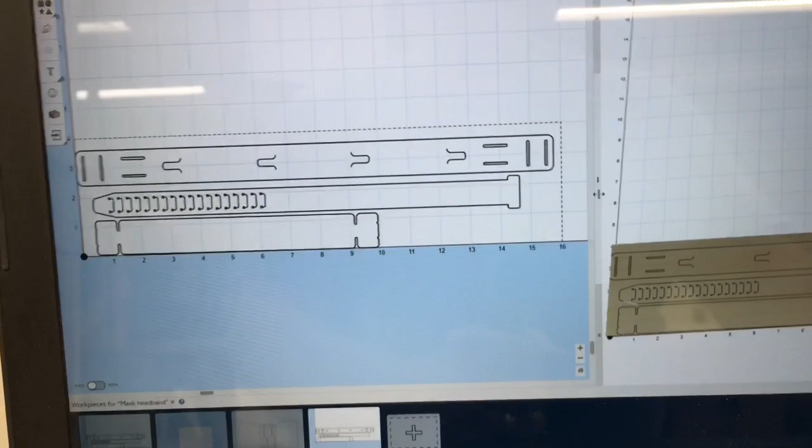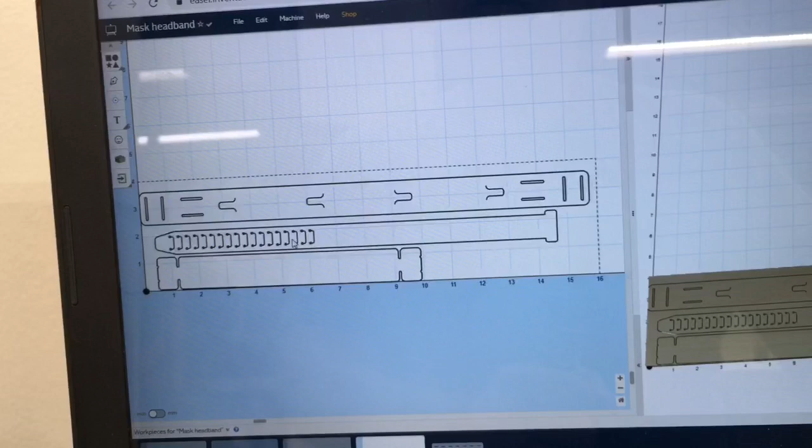Now the two files that I settled on was this one with just the headbands. The nice thing about this is these little tabs will allow the face shield to just slip on and hold it in place by having holes in the face shield itself. These little tabs here are really designed so that the ends can just slip in and hold it in place. So this one doesn't require any type of tabs at all. These little tips here are designed to slip into these slots to be able to hold it in place. So I wanted to be able to try this one.

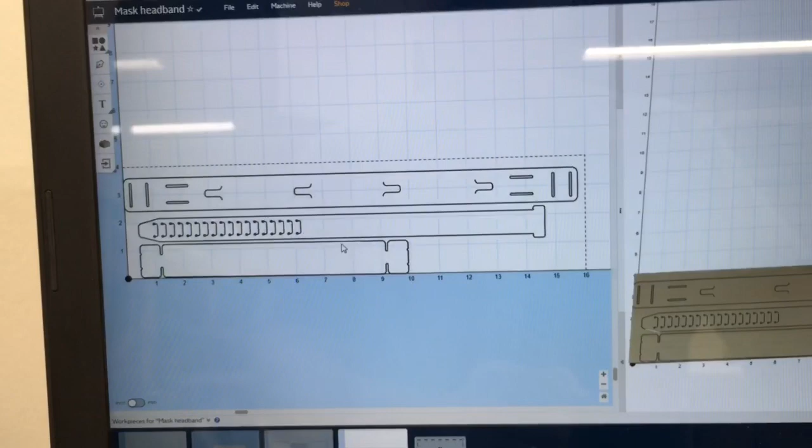Now the nice thing about this was a file that I found online, and quite frankly I don't remember where, but it was a free download and it was a DXF file. What I was able to do is just come over and click on this, and I can just import using this setting right here, DXF Import 2.0. And it actually brought the file into Easel.

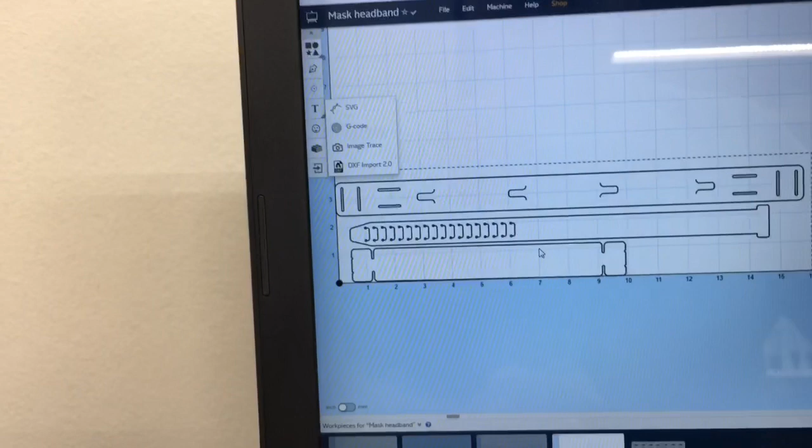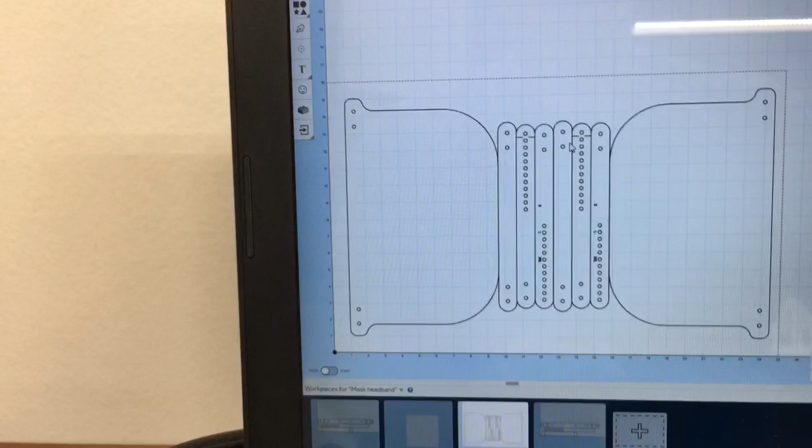The other file that I have was actually a larger file, and this had the face shield itself. The nice thing about this one, it's actually two face shields. I'm going to slide this over a little bit for you. Each of them have 3 bands. So these 3 bands will go with this face shield, and these 3 bands will go to this one. The only problem that I don't like about this one is it requires some type of a snap or a clasp to be able to hold it together. That's something I don't have, but I still want to be able to see if I can carve this.

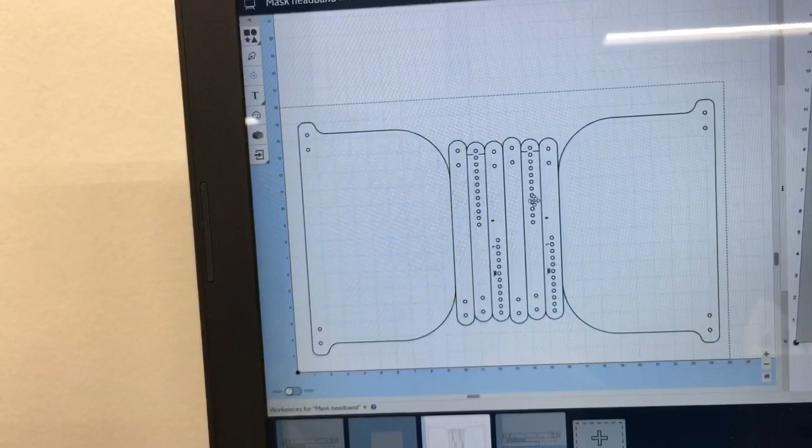Now this particular file was originally designed to be able to cut on the laser. Now I did eliminate the tabs, because it did have tabs scattered throughout this whole thing because of the different pieces, and I've eliminated all of the tabs. So I'm going to be using the glue and tape method to be able to carve this.

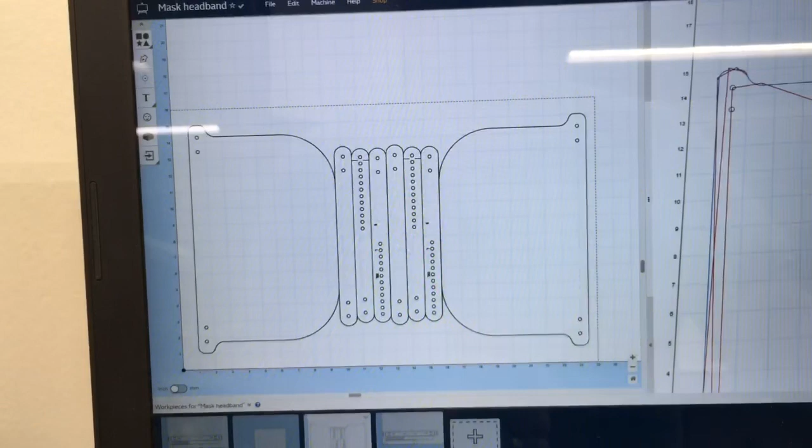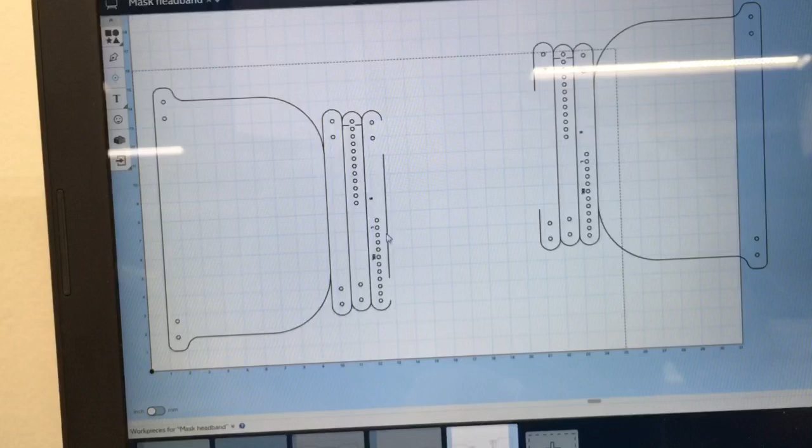Now one of the things I'd like to be able to do is just experiment with cutting out one mask. So what I did is just highlight it, and I'm going to open this up a little bit bigger. I highlighted this first one and pulled it out of the way. And you can see that this line right here is actually joining the same one. Alright, with that selected, now, and the endpoints are actually right here, I can grab hold of this and slide it right up to this other node.

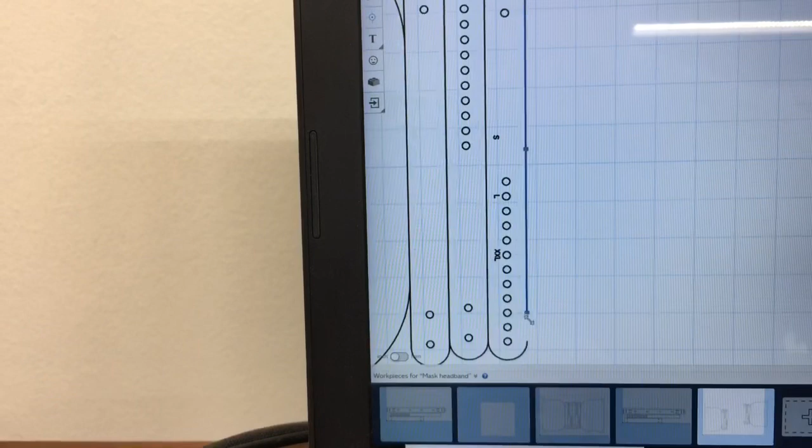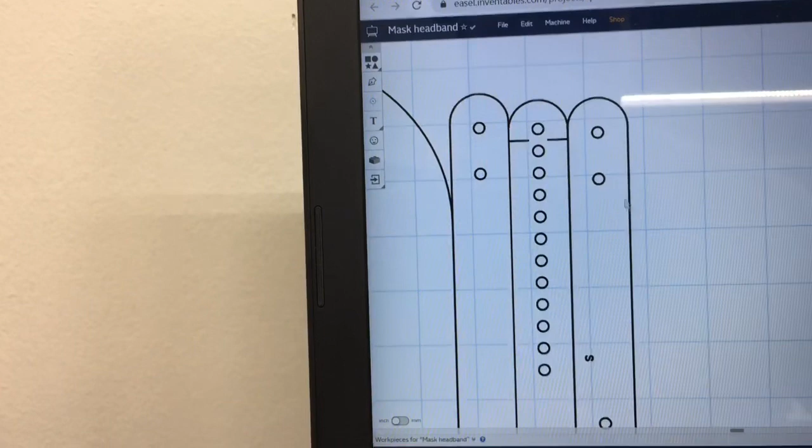And then I'm going to do the same thing down here. I'm going to grab it and bring it right down to this point. Now it's connected. Now this one up top did not connect, so I'm going to slide it up a little bit more so that it connects. And I'm going to zoom in even more and take a look at it. And I want to highlight both of these.

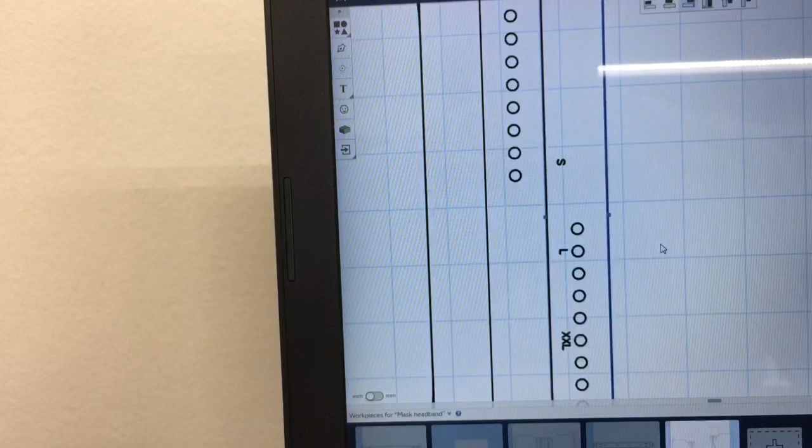And now I can see both of them, and it looks like it's joined together perfectly. I'm going to scroll down to the bottom and highlight both of these again, and it looks like it's perfectly joined. So that's one of the things that had to be done to be able to modify this to be able to carve.

With that now joined, it should allow me to carve one of these instead of both. Let me zoom back out. Now this one over here, I don't want to lose it, but I'm going to go ahead and put this one out of the way. I'm going to slide it right up here.

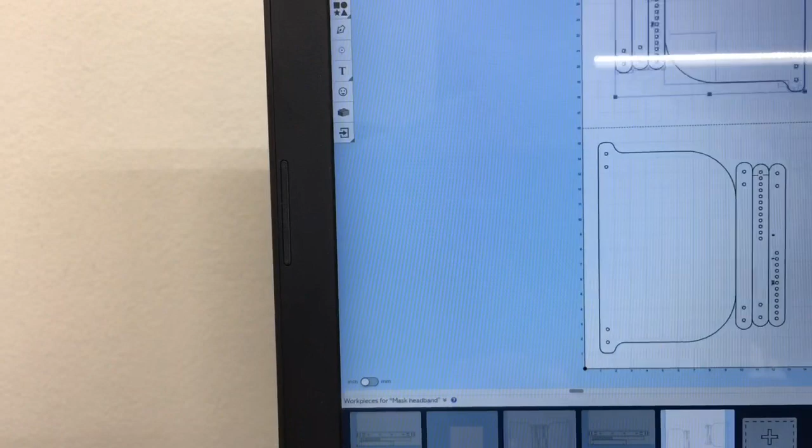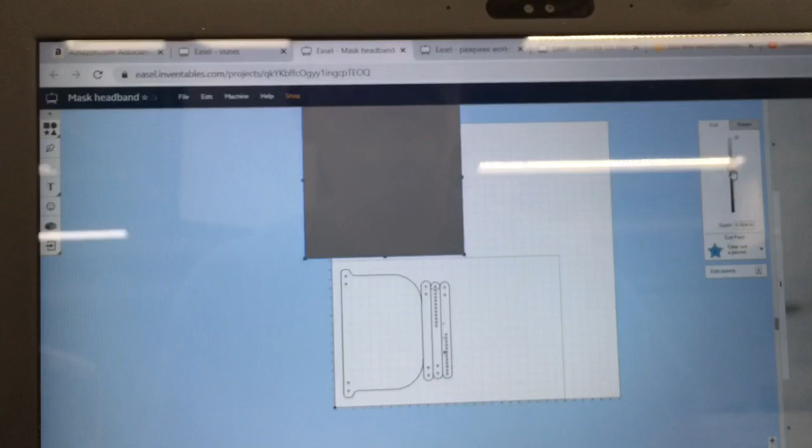And then the next thing I'm going to do is select a box. We've done this before. I'm going to make this box large enough to cover the whole entire area that I do not want carved. And then I'm going to change it to a 0 cut setting. With that at a 0 cut setting, I now cannot see it over here.

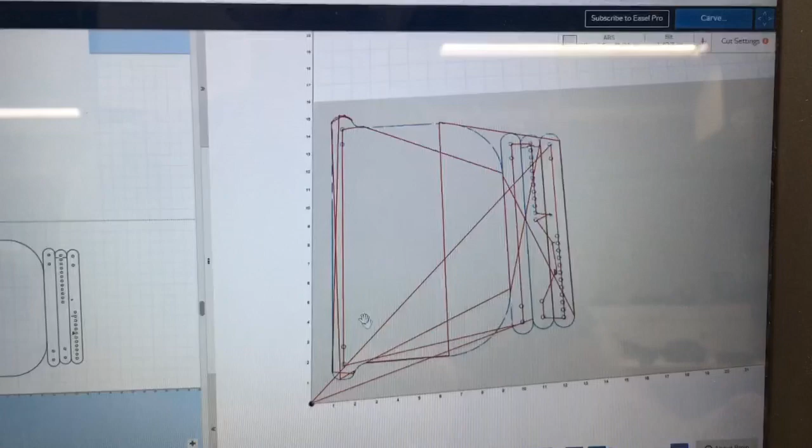So what I want to do is just go ahead and generate the preview, and let's set this up where we can actually see everything. And there is the one. If I do simulate, what's it going to carve? It is going to carve just the one. So that looks like it's going to carve just fine. So now I can go ahead and carve this.

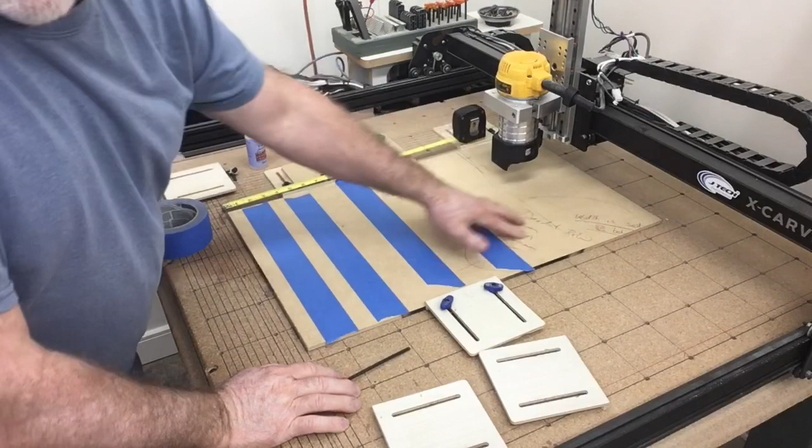Now I have my auxiliary wasteboard put in position. I'm using a tape measure as a reference to what's on the screen, and I went ahead and laid out all of the tape lines. Now the nice thing about this, I can come over and drop this right in place.

And then put the tape right where it needs to be. Just like that. And that helps to get the alignment where the tape's exactly positioned correctly.

Now then, the next thing I'm going to do is just flip this over, add the glue to it, and then that will drop in place right there. These little tabs of the extra tape I'm going to leave because it actually helps. It makes it a little bit easier to be able to remove from the machine once it's done.

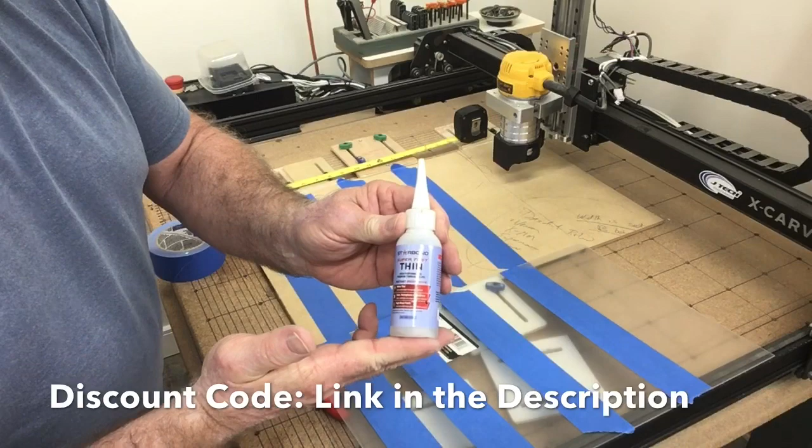So I'm going to go ahead and set this now right here. Add the glue to it. And the glue that I'm using is the Starbond glue. This is the thin, and I'm going to go ahead and put that on now. Now I could have used a medium thick glue. That would probably have worked better. But I don't have any that's open right now, so I'm just going to go ahead and use this.

Now I'm going to go ahead and flip this over and put it right in place. And I'll hold that down for just a moment. And we're ready to go.

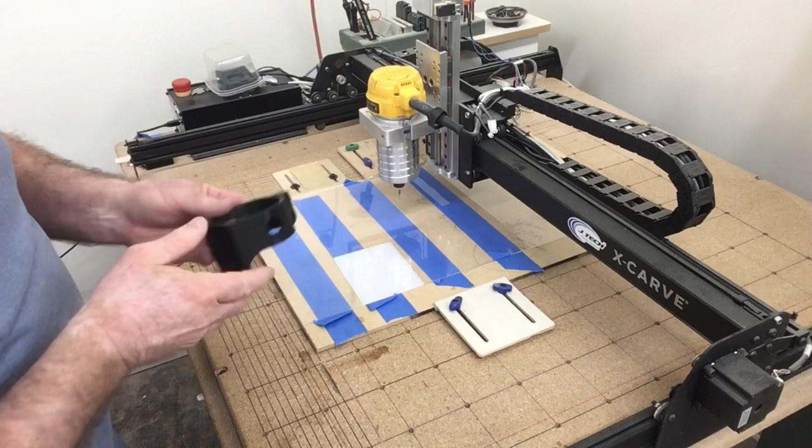Now the bit that I'm going to be using is a 1/32 upcut bit. The reason I want to use the upcut bit is so that it takes the chips and pulls it up and out. You do not want to use a downcut bit anytime that you're cutting the plastic. Now I did remove the laser mount and took it off of the router, and it just makes it so that you can see the operation easier. I did not need to do that, and if I wasn't filming this, I would have left this mount onto the router.

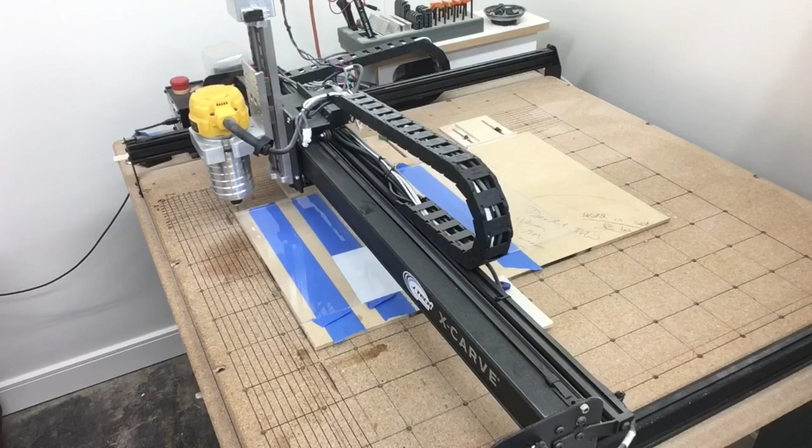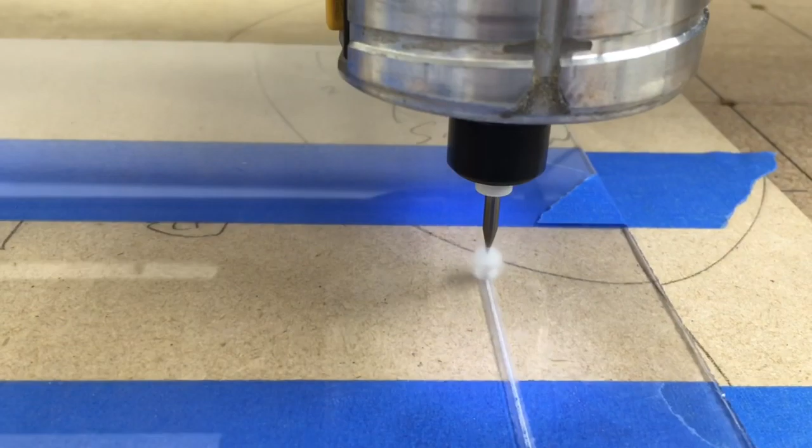You can clearly see that the acrylic is actually melting, so I'm going to stop this carve now. One of the things you can see is there's a lot of plastic on here that is melting, and I don't want that. So I've got to speed this up to be able to make it work.

Now I went ahead and changed the bit. I put a brand new bit in it, and I'll work on cleaning this bit in just a few minutes. But I went ahead and changed the setting to 60 inches per minute to start with, and I'm going to see if that will carve it better, because I need the chips flying. I don't need the chips melting.

This first pass is just carving air since it had already done it, and it cleaned up a little because of the melting. As the second pass started, the bit broke immediately, so I had to stop the carve and realize that a 32nd inch bit at 60 inches a minute was not going to work. The good thing is it was not melting.

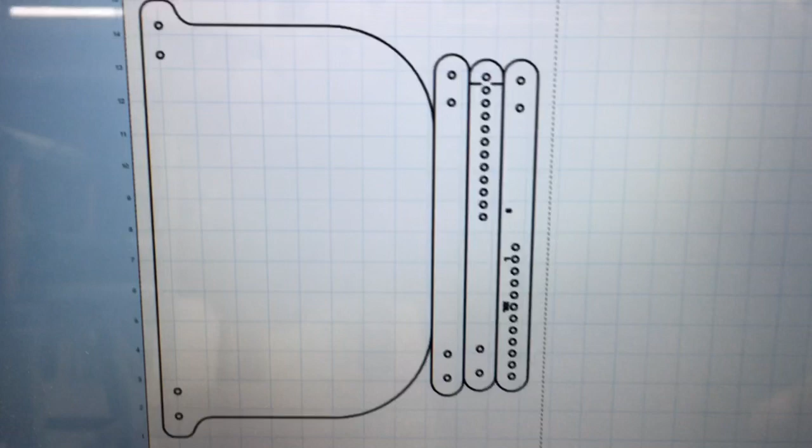I decided to change the bit, putting in a 1/16 inch upcut bit to give that a try. I changed the settings in the computer so the line width is wider, but I still think it's going to carve fine. Everything looks great on the preview, so I'm going to try carving it now.

Third time's the charm. This is carving really good, and it's not melting at all, which was the goal. This is the second pass as it starts, and again it's looking real good, and you're not seeing any buildup of plastic on the bit itself. That's what you want to see, chips flying instead of melted plastic or acrylic. So I finally have success using the 16th upcut bit.

To do this carve, I'm running at 40 inches per minute feed rate, and I want to increase this a bit more, taking it up to 48 inches per minute. At 48 inches per minute it's still carving extremely well, so I'm going to let it finish this job without increasing it any further. Looking at the bit after it finished, there is no melting at all. This turned out exactly the way I wanted.

I decided to do a finishing pass at 60 inches a minute, going full depth in one pass, and that actually polished up the edges and cleaned it very well. Don't forget, when you do a finishing pass like this at full depth, you have to go into the cut settings and adjust it so it also reflects the full depth. I'm doing this at 0.095.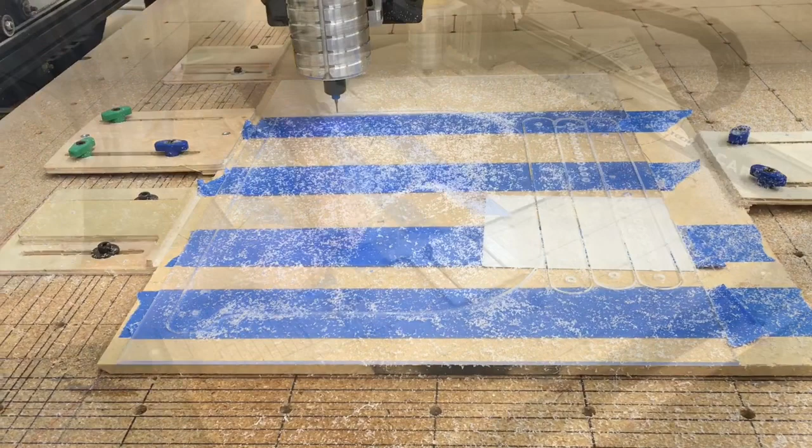Now it's time to remove the acrylic from the wasteboard, and you can see just how well the tape and glue method works. These pieces are coming out perfect. I wish you could see up close in the camera just how nice these are looking.

Because of the thickness of this material at 0.08 of an inch, it really does not bend the way it needs to. So I'm going to have to build a small jig and heat this material so that it forms the shape needed to create the face shield and headband.

To create this mold, I went out to the scrap bin and found some MDF left over from another project. The basic idea is I want to create a 4-inch radius for the basic part of this mold.

Now that I have the compass set for the 4-inch radius, I measured down from the top of my board and put a line with the square, because I didn't want this to be just a strictly half circle with nothing else to work with. So I'm going to create 2 circles here, which will be the 2 ends I need to form this mold.

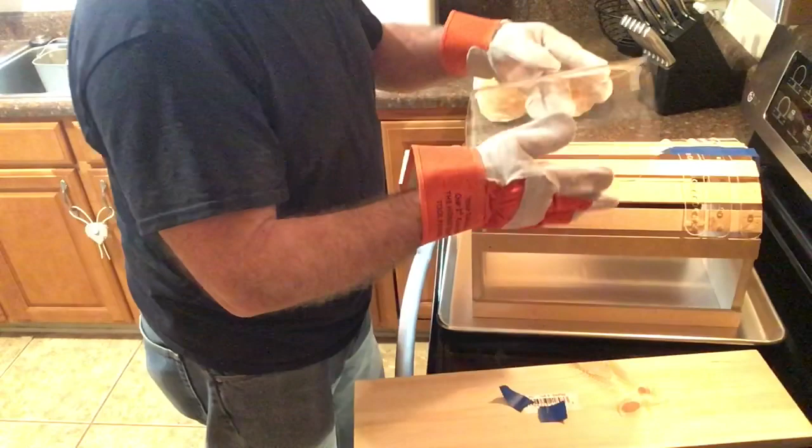Now this acrylic cools very, very quickly. So even though I'm keeping the leather gloves on right now, it's actually cool enough to touch. But you want to be real careful, because the last thing you want is to get burned. I did test it one more time, but these pieces have already cooled. So I think the 2 minutes is a good starting point, but that time certainly is going to have to be adjusted.

So now I have the face shield with the correct curvature that I was looking for, and I have my headband. So all I need now is some type of clips to put it together.